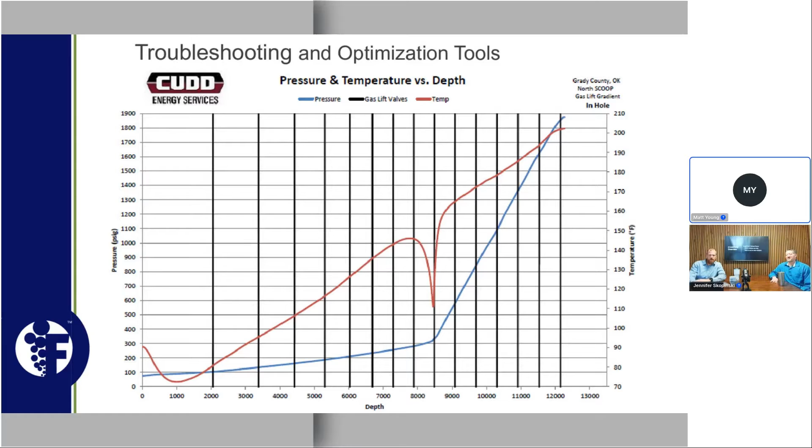Let's see. I know I had it in here somewhere. What's that? You can just share it for them. You guys should see it on this one, right? Sharing it through here. So sorry guys, we've changed systems. Oh, here we go. This is what I was looking for. We're trying out a new system, and this is the first time we've gone real live with it. We've beta tested it in house, but bear with us on a few things.

But barring the downhole gauge information, when you talk about trending, if we look at our blue line here, which is our injection pressure, we shouldn't see either a flat line like you mentioned, or, one of the things I also like to consider, severe cliffs, anytime something's dropping off. For me, that tells me either we've stopped injecting or we've developed a hole or a leaking valve.

I was thinking of something else when we were talking about believing in pressures or not. Early in the days of AI machine learning, we did this project where we had a field and we gave all the data for gas injection rates, pressures, production rates, and fed it into a black box system that would try to link the outputs of production to the inputs of all the data. And in the result, you get maybe the top 5 list of what affects your production on the platform, so you can better optimize it.

Oh, I see. And so, of course, number 1 was production rate, and then having gas lift gas to start, things you would expect. Another one was the casing pressure.

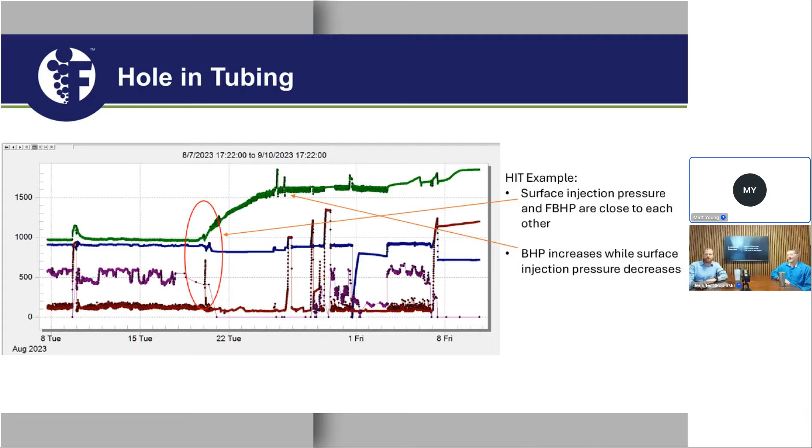So I jokingly tell operators that a downhole gauge is going to obsolete most of what I do. I hope it doesn't, because I like my job and I have bills to pay. But it has become, in my opinion, a game-changing tool from a gas lift side.

Historically, the only visibility you have on a gas lift well is casing pressure, tubing pressure, and injection rates. And then you hope those three are either looked at or gauged correctly, right? And from a downhole, hydraulic side, you really had to rely on models, and a lot of them are empirical models that are older than I am. And you had to rely on extra data just to build those models.

And what I found with the downhole gauge is, assuming that it's powered up and actually reading, you get a pressure downhole and a temperature downhole, and the accuracy on either a piezo or quartz gauge at this point is multiple decimal points back in terms of drift and accuracy. There may be some reservoir engineers who could use more, but probably.

But for us, simplistic operation guys, I'm happy to get just 10 psi accuracy. Hell, I'd probably maybe take even more than that.

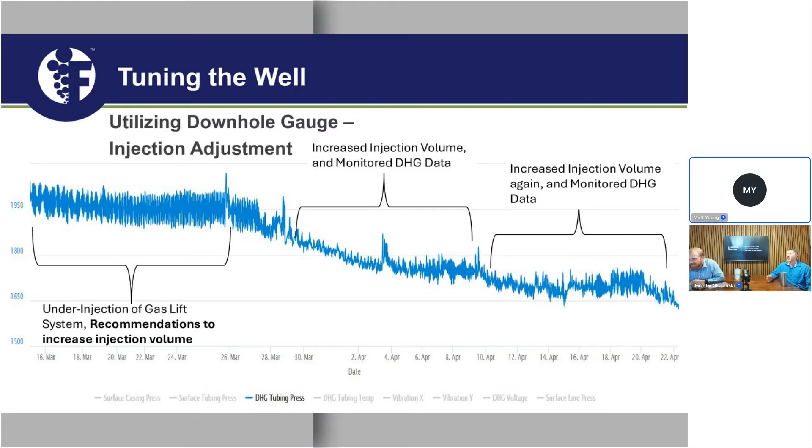So with well tests, there can be quite a bit of variability there. You mentioned the bulk testing, where you're trying to allocate back to wells. Also, if you go with a three-phase separator, three-phase tester, you can have issues with how much water versus oil it's making. Maybe not as much with lighter oils, but when you get to heavier oils, the heavier oil and water look about the same to the separator at a certain point. At API 10, the density is the same for water and oil. Oh, okay. And if you're trying to use gravity to separate the two, then they don't really want to separate.

Right. So when you're getting into that, you can get some really varied measurements of what your water cut is, where you might just have to take a shakeout of it. Just pull some and sort it. We had a field offshore California like that where the oil was super heavy, and that was really the only way that you could trust whether you were getting a good water cut measurement out of it. Oh, no kidding. To get a hard shakeout. Shakeout to see.

Yeah, and that's a good point, and that's why I wanted to bring up this presentation here, talking about that testing, right? Outside of those well tests, like you mentioned with the shake test, what other things can operators look at possibly implementing, again, putting it in that troubleshooting toolbox, if they're getting well tests and like, this doesn't make sense. Right. What can they do besides just sending the lease off to go do another well test? Because usually by that point, they're going, I got so much other stuff to do. I don't want to have to bring this well back into test that I just tested last week.

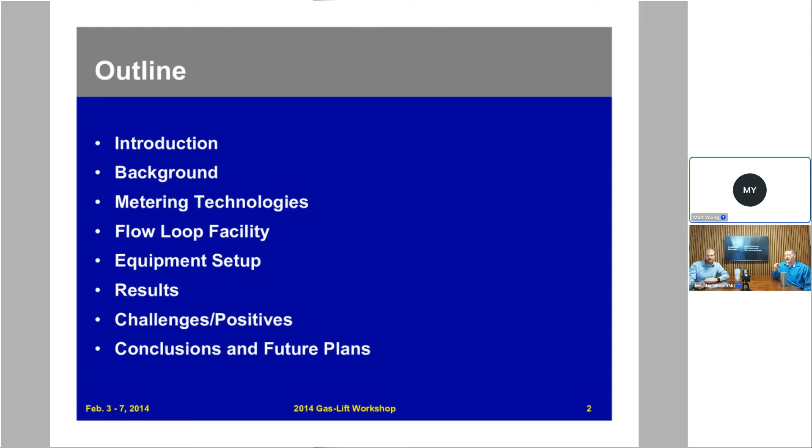Yep. And so I wanted to share some of this. We don't have to go through the whole thing, but if there were any specific points to touch on. So go a little further. There should be one that shows transducers on pipe. All right. Bear with us, guys. We're going to jump a little further, jump across a couple slides to reference a few things. Yeah, I think I have one with a picture of us doing the testing.

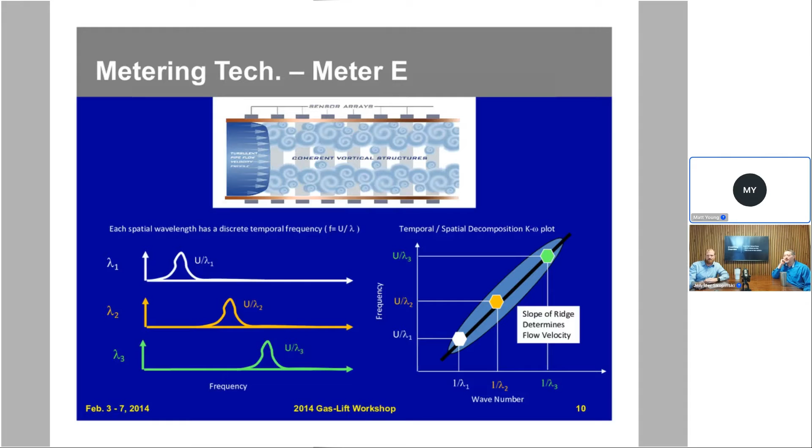All right. And these are just additional ways to confirm some of those well tests or help validate that information. Right. So one of the things that's key for gas lift diagnosis is, well, how much gas lift gas am I injecting? And you'd think, well, that's easy. I know that. I have a meter. Well, do you have a meter? There are a lot of places where you don't have meters for individual wells. Fortunately, in unconventionals, we've gotten a lot better about putting an injection meter on every well.

But there have been plenty of fields out there where the only meter that you have is the test meter. So you're really only getting your gas lift injection rate when you put it through test. Because that test meter is going to be your formation gas plus your injection gas coming back to it, right? Right. They might have a way to route your injection gas through your test meter or your test separator setup to get that rate. Oh, I see. Then you can separate out the total to see how much is formation versus the injection gas. But one of the issues with that is that, let's say you only have one place where you can test your gas lift injection rate.

Well, does every one of your wells have the same injection rate? No. Is the meter the same for every test? Yes. And so it's not going to be in range for every test. It's not going to be accurate for everyone, especially if you're using an orifice plate type meter for your gas injection rate. Also, if you only have one point that you're testing at and every single well has to go through it all the time, eventually that nice square-edged orifice is going to turn into a cone. And it's really not going to be accurate then. So sometimes it helps to have, like we were saying with pressure before, a secondary device that you can bring out to verify what that value is.

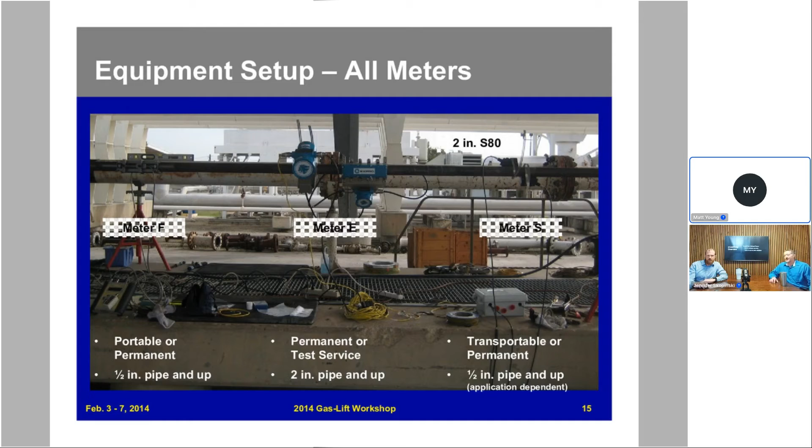I think you had a slide of that. Yes, let's go back just a few. I saw it. Probably one more. Maybe one more. This one? Yeah, that one's good.

Okay, so you're talking about a transducer on top and on bottom, in the white and yellow, of the flow pipe. Right. And then you send a signal through, and it goes from one to the other. And sometimes you'll bounce it down and back up like a triangle where they're on the same side. It just depends on the geometry of the pipe, and there are guides for how to do that. But that transit time of the sonic signal from one to the other will be affected by a small amount by whatever's flowing through the pipe, because there's a speed of sound through whatever media is going through the pipe. And so that's what the device is using to tell you what the flow rate is going through the pipe.

And it helps if you have higher pressure. So gas lift gas is one of those. Helps if the gas is dry. It isn't always. It helps if the pipe is bigger, because if you have a smaller pipe, then that sonic signal is just going to want to ring around the outside and take a shortcut. Oh, I see.

But if you're looking at it, you can get it done with half-inch pipe and up. Smaller than that's kind of tough. 2-inch is great, 2-inch and bigger. I was about to say, hopefully they're not injecting gas in anything smaller than half an inch. Yeah, I've seen places that... I bet you have. Yeah. But this works pretty well.

We were using a Flexim meter. That was one of the ones in this test. So our gas lift experts who go out to do surveillance and optimization have one of those in their toolkit. So they'll bring out the transducers, go put them on the pipe, and on the portable meter you put in a few things like the pipe wall thickness, speed of sound through the gas, which you get from an Echometer also, and then you can measure that flow rate going through. So it's a good secondary confirmation of what your test meter or other meter is giving you.

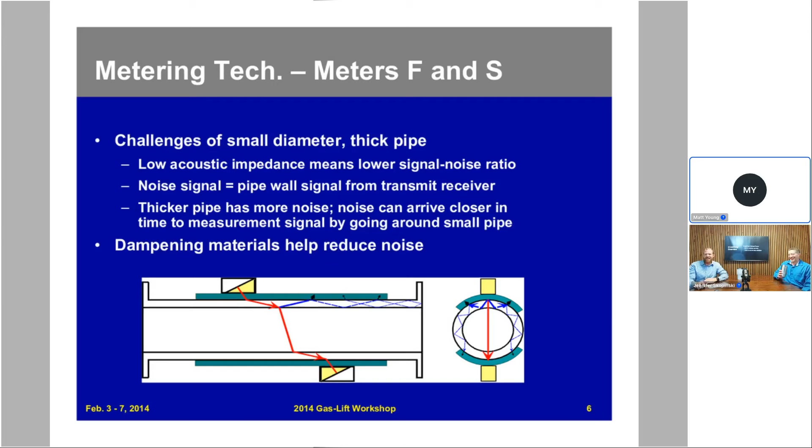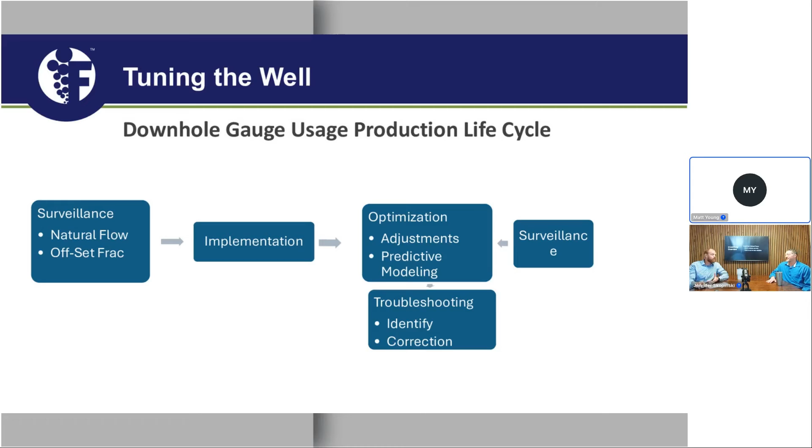Yes, I've always enjoyed fluid level shots, and there's other people besides Echometer, but Echometer is like Kleenex, right? Of fluid level shots. Yeah. So I do try to be cognizant of calling it a fluid level shot rather than just Echometer. Kind of like Xerox. I fail most of the time. I do too. I kind of go back and forth.

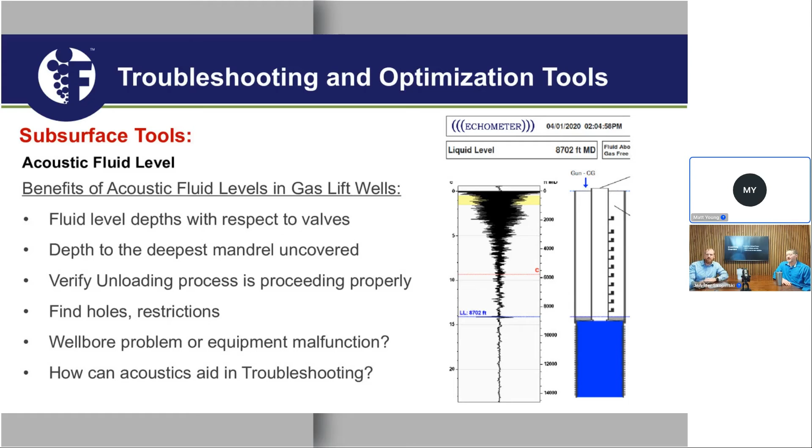But with a fluid level shot, and now with that dual reading fluid level shot, that has become incredibly helpful for finding things like pinpointing holes in the tubing. And when you look at a fluid level shot, Echometer, because they're the most accessible where we operate, you can get some really good markers downhole. And with the TAM software, which isn't very new at this point, everything's computer driven. You can adjust PVT properties, velocities, and you're not having that 50 foot of white tape blowing in the wind and having to count it.

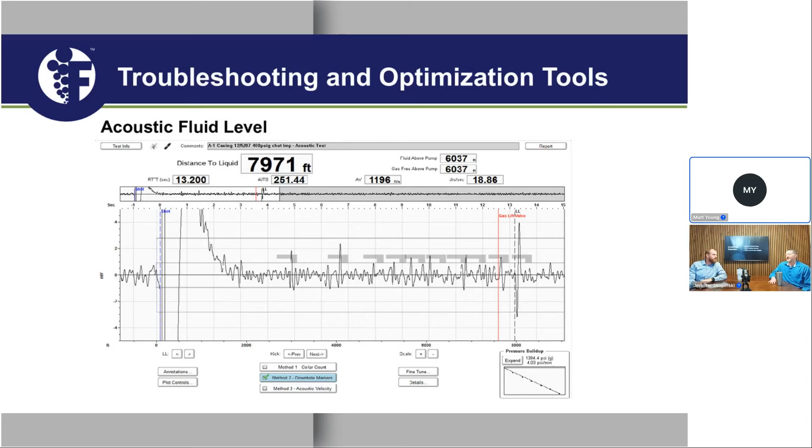It is very helpful. One thing that excites me about it is if you're unloading a conventional well, you can take multiple shots over time and watch how your fluid level in the backside is dropping and you're unloading like you plan to. Yep, from gas lift valve to gas lift valve as you work down. But even for an unconventional well, Echometer and others are working on systems with automated fluid level shots. So maybe once an hour or a few times a day, you can get a shot, have it analyzed, and give you a number.

So then you could track over time as your reservoir pressure is dropping and you're transferring from valve to valve down. You'd have to leave it on the site for months probably, but it's useful information where otherwise you're having to back calculate into it from your bottom hole pressure gauge and modeling. Wow, that'd be really helpful. So for a case like that, would that be in addition to a downhole gauge, or could you almost use that in replacement of a downhole gauge?

I think this might be in addition to it. I guess it depends how the gauge is ported. If you do have an annular pressure on your gauge above the packer, then you could look at that for what you have on the backside to try to figure out where that liquid level is. I see. And that brings up another good point too.

Back to the gauge side, most gauges run, at least in the US, are single sensing gauges. So either sensing casing pressure for an annular flow well or tubing pressure for a conventional or tubing flow system. There are gauges readily available that have dual transducers, and I don't think there's much of a cost difference between the two. There might not be a price difference at all.